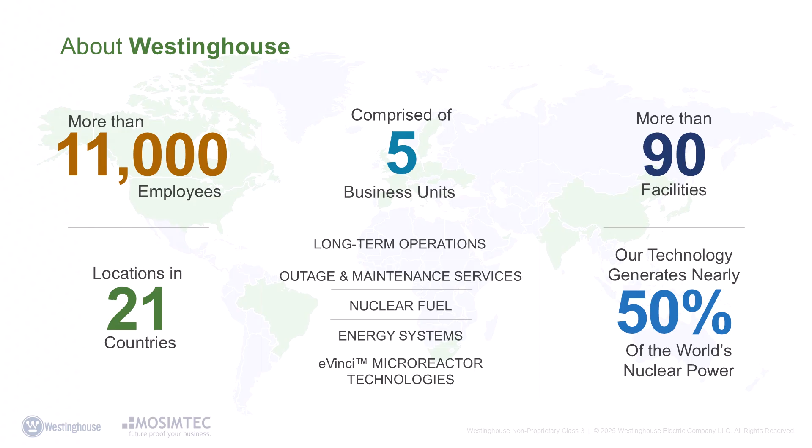The company employs more than 11,000 people across 21 countries, underscoring its international reach. It operates with 5 distinct business units: long-term operations, outage and maintenance services, nuclear fuel, energy systems, and the innovative eVinci microreactor technologies. With over 90 facilities worldwide, Westinghouse's technology plays a pivotal role in generating nearly 50% of the world's nuclear power, emphasizing its critical role in the global energy landscape. Today, our focus is on the nuclear fuel business unit.

Westinghouse is a complete fuel supplier, handling everything from development and manufacturing to core engineering, safety analysis, and fuel component manufacturing. Westinghouse offers 4 key fuel types. Pressurized water reactor is the most common type of nuclear reactor, using pressurized water as both a coolant and a moderator. It is characterized by its safety features and reliability.

In a boiling water reactor, or BWR, water is boiled directly within the reactor vessel to produce steam, which then drives the turbine. This design is simpler, but can be less efficient than PWR. Russia developed a type of PWR reactor, VVER, or water-water energetic reactor. This one operates similarly, but with differences in design, primarily in the pressure and temperature limits of the coolant.

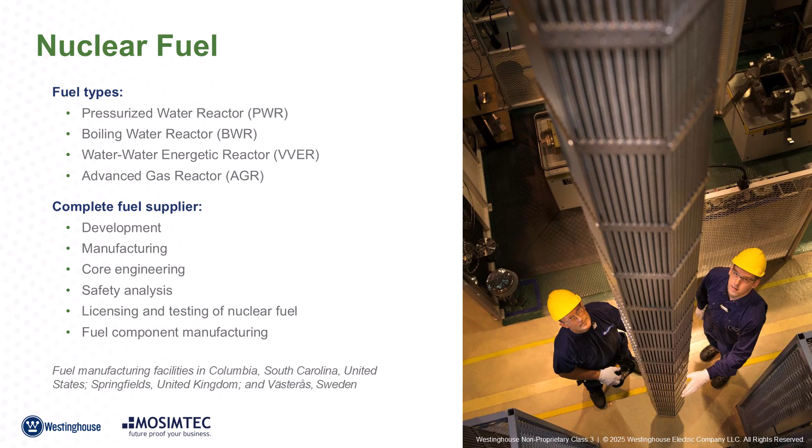Finally, advanced gas reactor, or AGR, uses carbon dioxide as the coolant and graphite as the moderator, with the core being heated by nuclear fission. It offers higher thermal efficiency and is commonly used for experimental or future energy designs.

So where does MOSIMTEC fit in? We are a consulting services company focused on utilizing modeling and simulation technology to make informed decisions. With a 14+ year track record and consultants with even longer personal experience in applying modeling and simulation, we're fortunate to work across a broad spectrum of industries. Return clients include very well-known brands and others you may have never heard of, but serving a key part of everyday life. We have a saying, one day we might be flipping burgers for a quick service restaurant, and another you're working on rocket engines for space exploration.

Our simulation work truly provides an opportunity to learn about a wide range of businesses, and more so, being able to guide our clients to know more about their own business continues to be really fulfilling. We're proud to call Westinghouse one of our many long-standing clients and appreciate the opportunity to share with you today some of the work we've done with them.

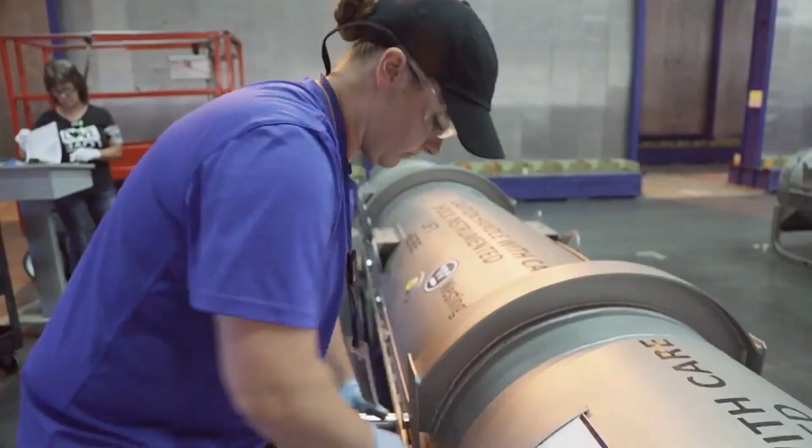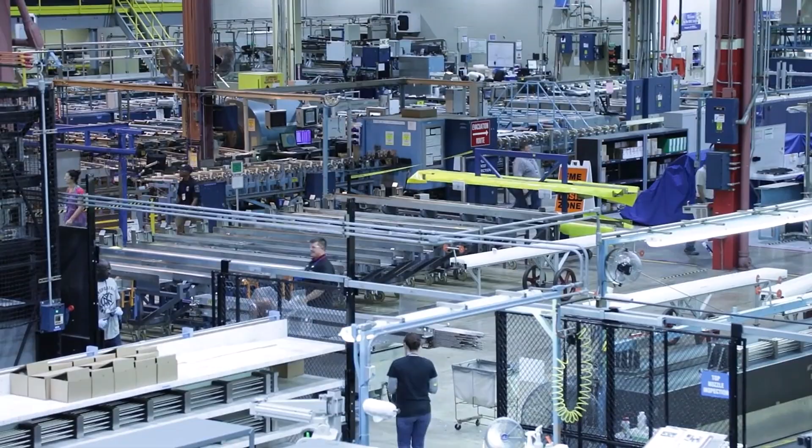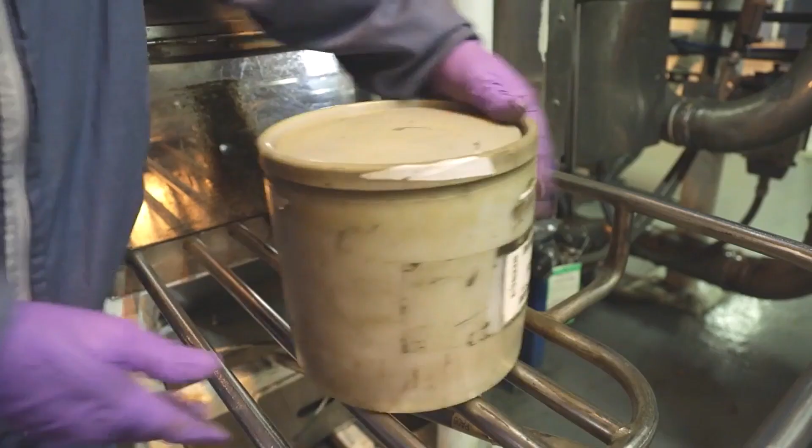The Columbia plant sits on more than 1,000 acres. Inside, the plant is divided into two main sections, the chemical side, where uranium is processed, and the mechanical side, where assemblies are fabricated. Enriched uranium is shipped to the chemical side of the plant. Here, it is converted into a gas and then into a powder. The uranium powder is tested to ensure it meets exacting specifications.

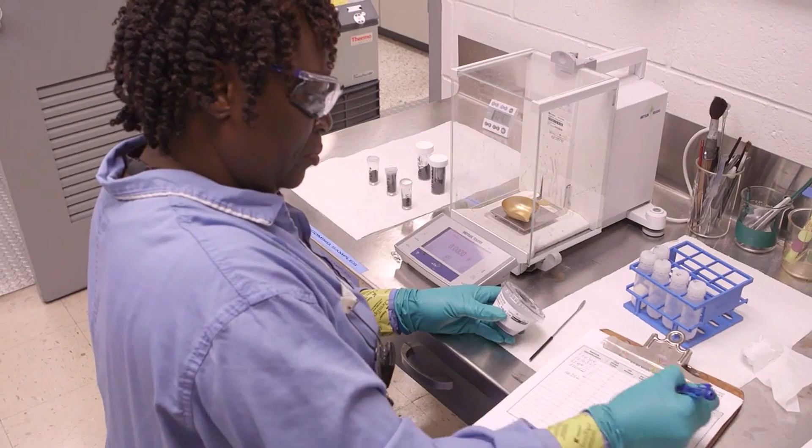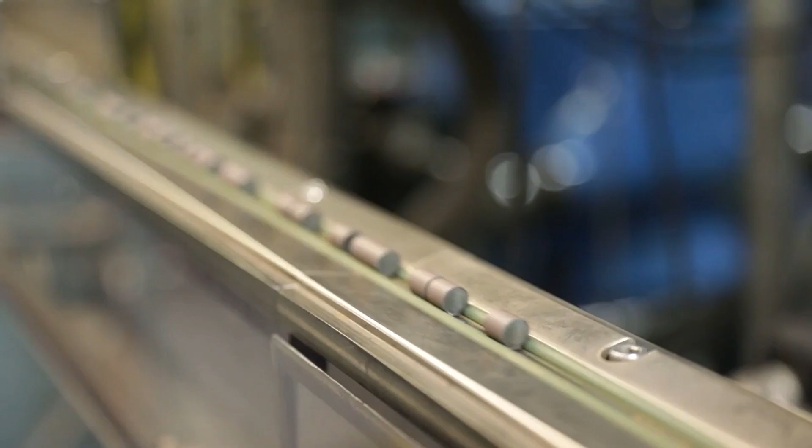In the chem lab, we test the quality of the pellets and the powder as they come off the line, and we have to make sure that the quality is good enough for them to move on and put into rods. The uranium powder is pressed into small pellets, each one about a half-inch long and holding as much energy as a ton of coal.

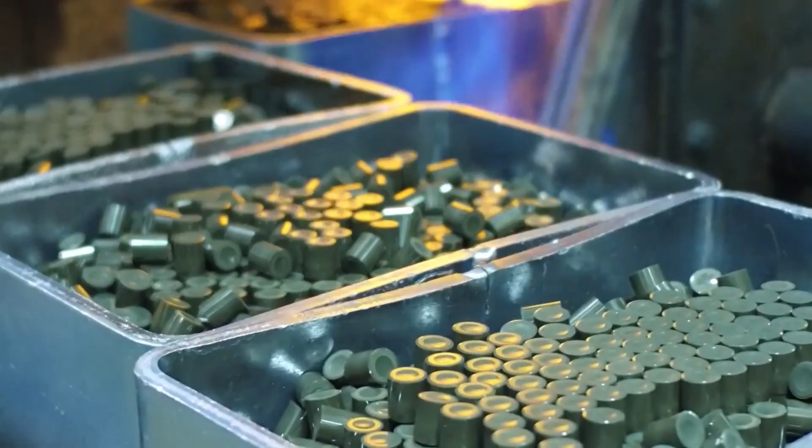Once pressed into shape, the pellets are fed into a high-temperature furnace that increases their density and converts them into a hard ceramic. And then we grind them down to the proper diameter, and then we inspect it before it goes out to be loaded in the rods. There are several production lines running at once, and control room operators monitor critical steps across the lines to ensure quality and safety. Control room purpose is making sure all lines are running by each parameter that's set by engineers. So you have different parameters set for each line.

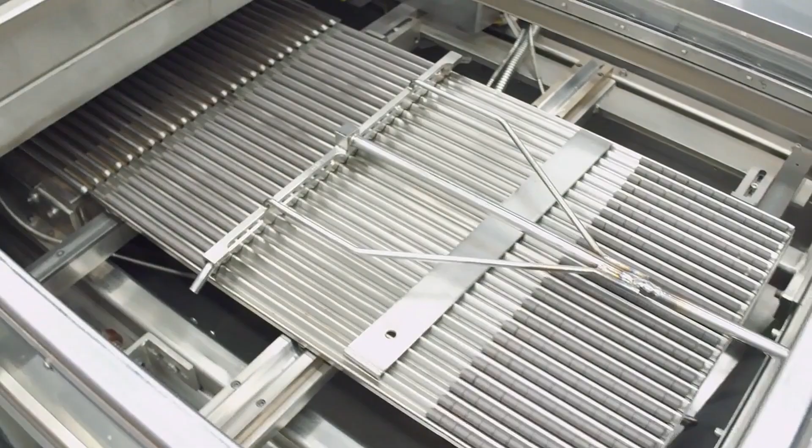In the rod assembly area, pellets are loaded into tubes that are manufactured at a separate Westinghouse facility in Pennsylvania. The tubes are pressurized with helium and sealed, and the completed fuel rods move to the mechanical side of the plant. Once it comes through the wall, it's now enclosed in a rod. It's encapsulated, and it's not just one pellet, but a series of pellets. And that rod, it gets treated. The ends get closed up, it gets polished, hardened on the tip.

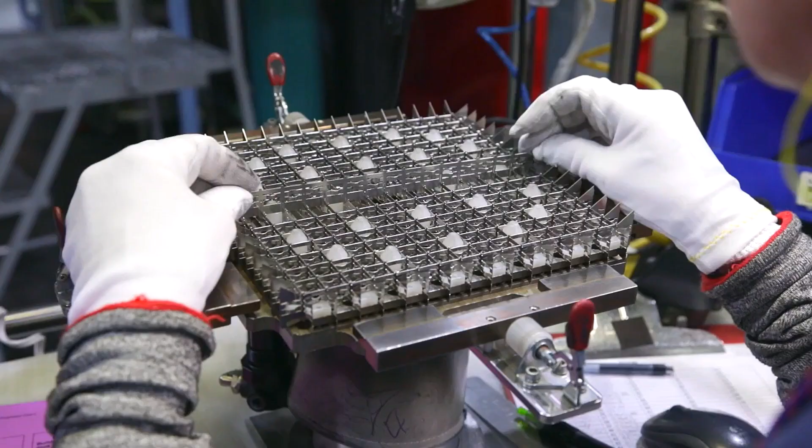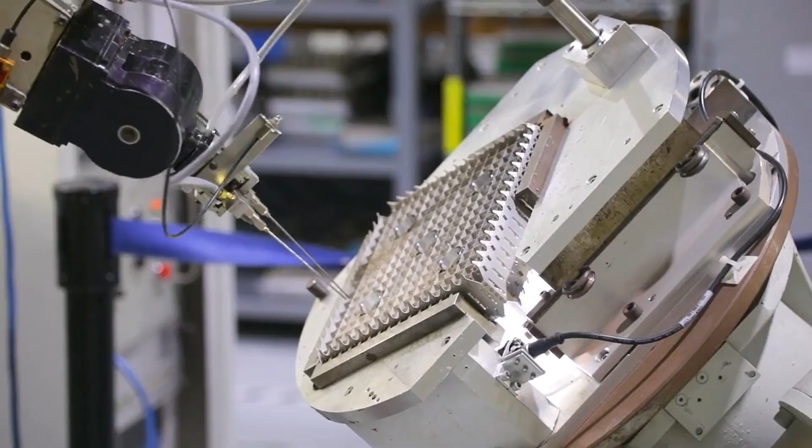Fuel rods are mounted into an assembly, the structure that holds the rods in place. A typical assembly can house 76,000 fuel pellets. Assemblies are manufactured on site using human skills and robotic technology. Once completed, assemblies are washed, inspected, and packed for shipping. At Westinghouse, what we do matters. We power the world.

The video you're about to watch highlights key components that make up a boiling water reactor, or BWR, fuel assembly. BWRs are just one of several types of nuclear fuel assemblies manufactured by Westinghouse. The video focuses on the major materials used in the top, middle, and bottom sections of the assembly. In both manufacturing and planning, we differentiate between nuclear and non-nuclear materials. Nuclear components include fuel rods, pellets, and their composite structures. Non-nuclear or mechanical components form the structural framework that supports the fuel rods. In the case of Westinghouse models, we concentrate on the manufacturing aspects within the facilities.

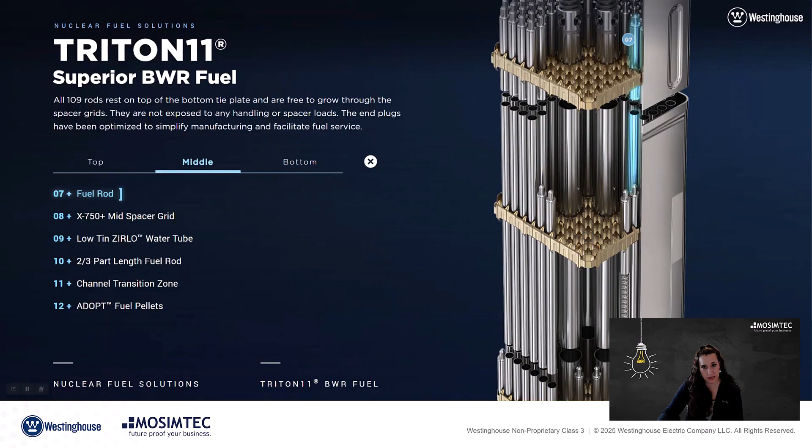The Simio model architecture identifies which materials are needed for a fuel assembly and triggers their production and consumption based on a detailed bill of materials. Each material type follows a specific manufacturing route, which allocates the necessary resources after consuming the required input materials. The model also considers inventory levels and work in progress before starting any production. To account for purchased materials, the model includes expected lead times for each item.

The planning process at Westinghouse, previously, we managed this through 5 separate sites, 5 different planning groups, all operating independently. The majority of it in Excel, with no integration, no constraint between. Manually entered spreadsheets, meaning that when we created the master schedule for 18 months to 2 years, if there were any scenarios or if there was a change, it would take us up to a week to be able to assess what that change was. And then each area would then flow down from that to allow it to be a final answer as could we do it or not.

With the implementation of Simio, what we've been able to do is make these decisions a lot quicker. The simulation model can run and we can change parameters, as you know, in Simio, based off the tables, based off the demand data, and run a simulation to assess the impact. But not only that, it is an integrated schedule for all areas to allow us to make sure that we don't have gaps in our analysis.

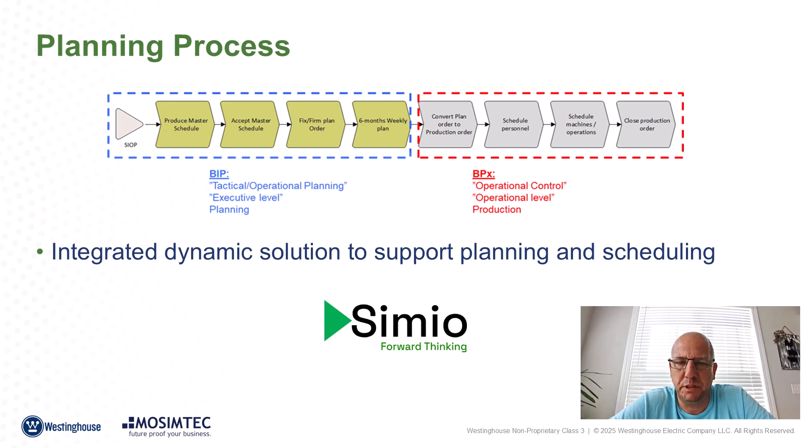Adding to the scenario building with the complexity across 5 sites, and you'll see on the next slide how everything is integrated with a vertical supply chain. It could take up to a month for us to do a high-level change at the Columbia facility to assess the impact on the WZ facility, which is at the bottom of the vertical supply chain, which would mean that if WZ could not do it, we'd have to start all over again or do a partial assessment, which would not give us the full visibility of the impact of the change we are proposing.

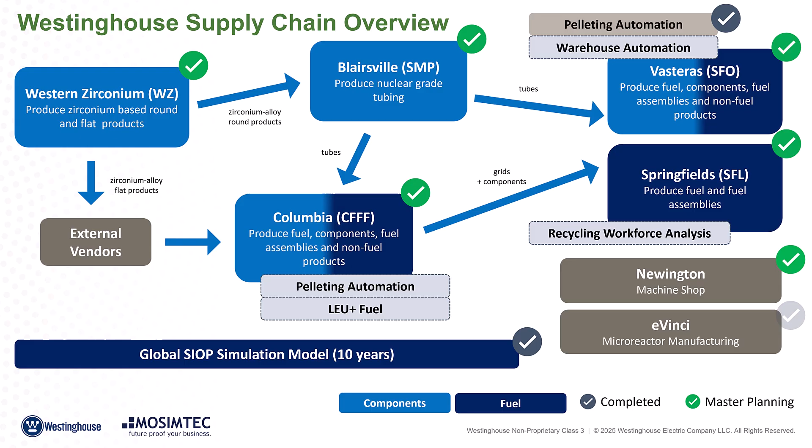This slide presents a high-level overview of the global Westinghouse supply chain, highlighting the interdependencies across various sites. Materials are produced at different locations and must be transported to the appropriate consumption sites to meet contractual commitments with both internal and external customers. These commitments are often tied to key performance indicators such as core loading plans, customer delivery dates, and/or contractual delivery dates.

For most sites, Westinghouse utilizes Simio's planning and scheduling tools indicated by the green tick marks, while a few locations have been analyzed through independent project studies also utilizing Simio, such as the pelleting automation and eVinci projects. These models help ensure that each site can deliver components or fuel assemblies on time by generating detailed production schedules tailored to meet delivery requirements across the supply chain.

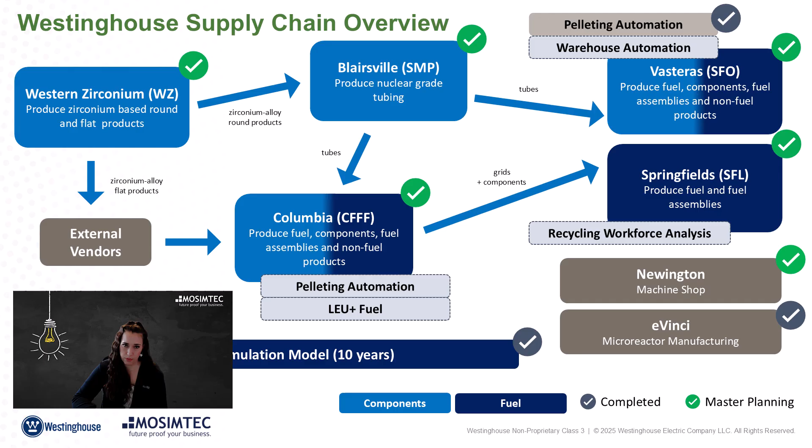At MOSIMTEC, we follow a proven process for deploying simulation models, a process we also use to implement digital twins at the Westinghouse sites. First, the functional design specification. We begin by developing a detailed specification document that outlines the system to be modeled, the modeling approach, and the required inputs and outputs. This ensures alignment on scope and expectations from the outset.

Then, phased model development. Our modeling approach is iterative. We build the model in phases, enabling the customer to see a working end-to-end version early on in the process. With each iteration, more detail is added, allowing for flexible adjustments and informed decision-making throughout the development cycle. Verification. This is the formal process of testing the model to ensure it meets the specifications and it performs as intended. Verification confirms that the model behaves according to the design and logic outlined in the requirements.

Data collection and ETL. Because we emphasize a strong specification phase, data requirements are clearly defined before development begins. This enables parallel workflows. Data collection and transformation can proceed alongside model construction, improving efficiency. Validation. Validation ensures the model accurately reflects the real-world system behavior. While verification checks internal logic, validation evaluates the model's outputs and assumptions holistically, confirming the full model ecosystem, the code, assumptions, and input data, behaves like the actual system.

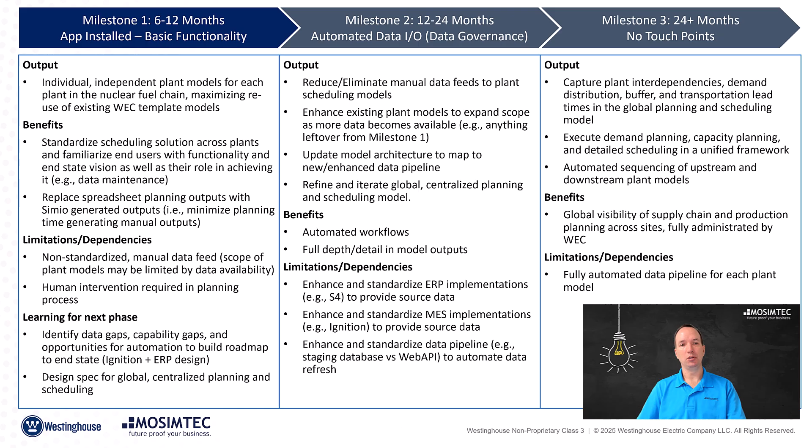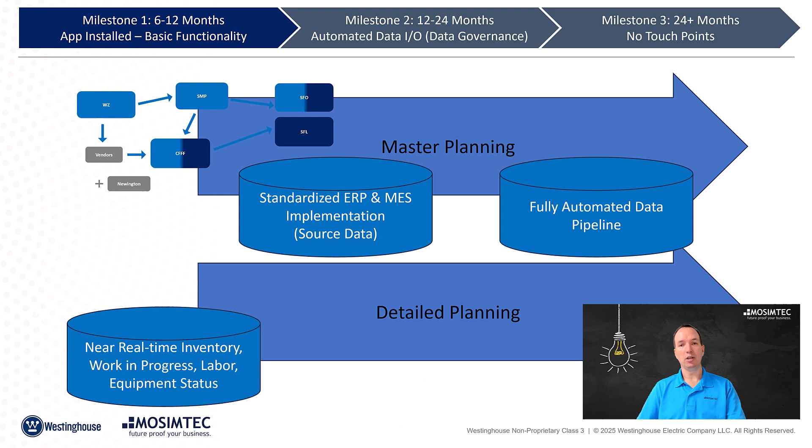Various sites at Westinghouse are at different levels of maturity with regards to milestone 3. This is where digital twin solutions serve strategic long-term planning, master planning, and even detailed planning. Each of these applications have a key prerequisite of either standardized source data towards a fully automated data pipeline or more granular near real-time data to represent accurate current state.

This data feeds into Simio, which processes it to produce capacity feasible planning and scheduling. Specifically, Simio supports critical functions like master production scheduling, MPS, resource capacity planning, material requirements planning, and detailed planning. The output from Simio includes manufacturing orders, planned orders, inventory levels, task lists, resource assignments, and material requirements. This ensures that operations are aligned with the availability of resources and materials.

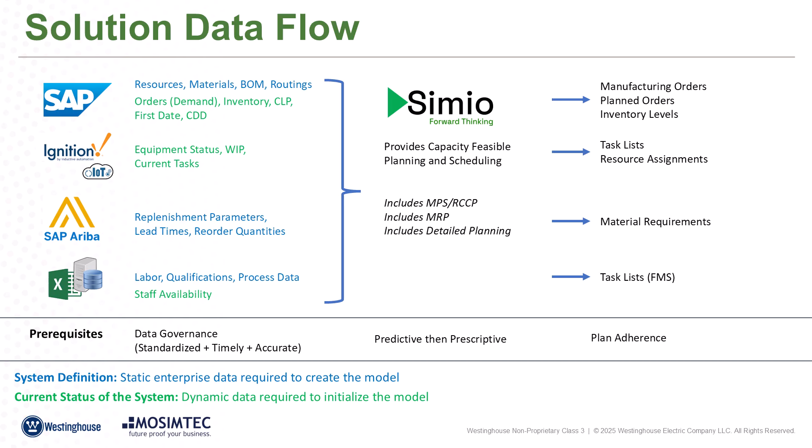For us, system understanding and definition begins with the development of a detailed functional design specification, as mentioned earlier. We believe that if you can't clearly describe a system, you can't model it effectively. This document outlines both the real-world system and the intended model, using diagrams and narrative to convey the necessary level of detail. The functional design specification is reviewed and approved by the client, ideally before model development begins.

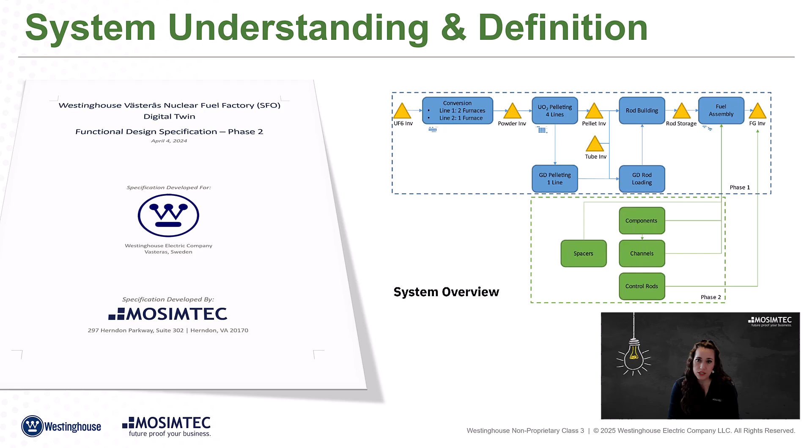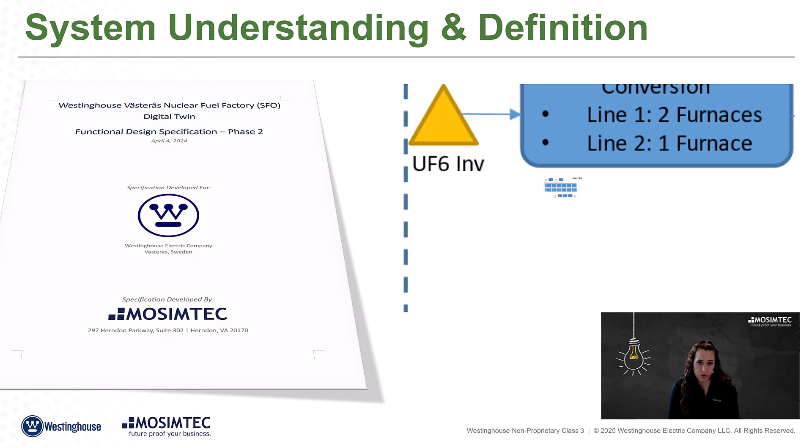However, it remains a living document, evolving alongside the model as new insights emerge. Clients at the Vasteras site have expressed that they find this document especially valuable as it provides a single, comprehensive reference that captures the entire process from start to finish.

To build a true digital twin that extracts live data and runs a scheduling plan, it was crucial to ensure the right data came from the right sources at the right time. To prepare the data for import, we developed extract, transform, and load, or ETL, solutions to clean and integrate the raw data. This was an iterative process involving on-site stakeholders with many adjustments made along the way.

Currently, the data import is Excel query-based, which is not the final enterprise version, but works well for the current stage due to its flexibility and quick implementation. Throughout model development, we made extensive use of error logs to provide feedback to the clients, helping them clean and standardize their data.

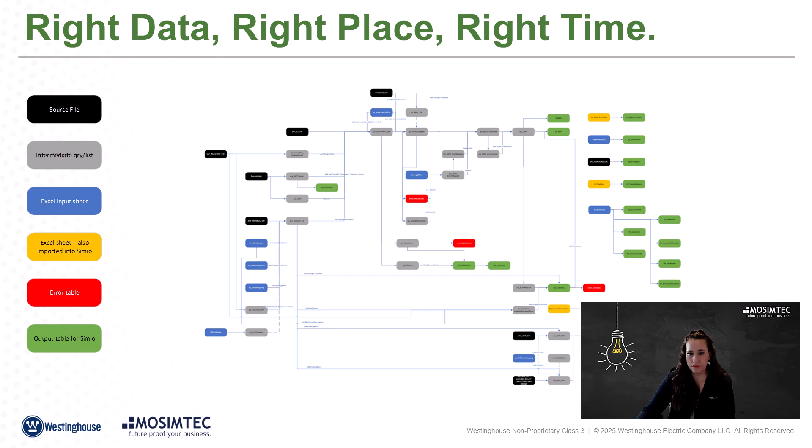The result of the ETL process is shown in this slide. It illustrates the model-ready data schema within Simio, highlighting the relationships between the various data tables. The models we created are fully data-driven, meaning they rely on real-time, dynamic data inputs. This approach provides users with the flexibility to quickly refresh and generate new plans that span multiple years. What previously took weeks can now be accomplished in just a few hours, enabling faster decision-making and more efficient planning processes.

Production performance. After each run, users can see a comprehensive overview of production performance. This includes a comparison of the results from the generated plan to actual operational or contractual targets. This feature helps assess whether production goals are being met and highlights any discrepancies that need to be addressed.

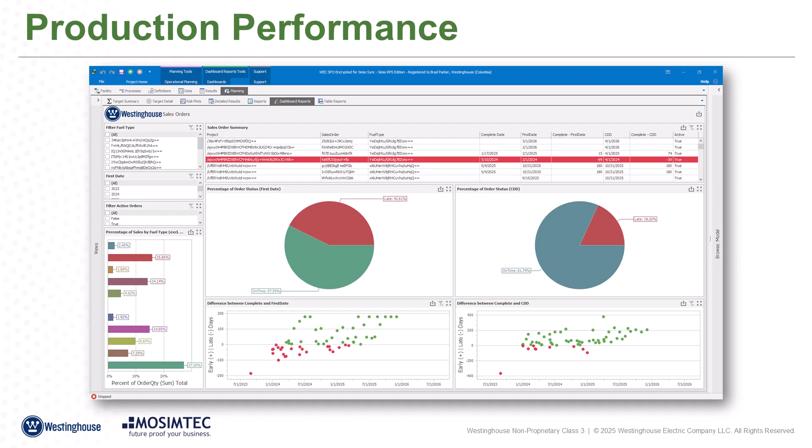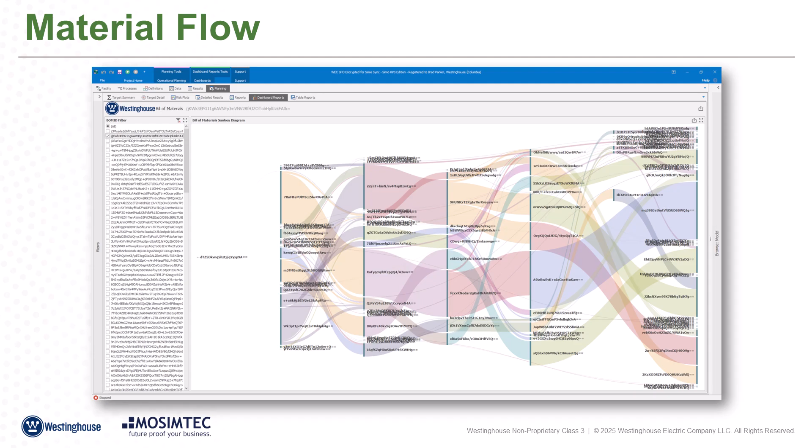The flow of materials. This dashboard visualizes the flow of materials throughout the production process, ensuring it matches the bill of materials. This is crucial for tracking material consumption and verifying that the right materials are being used at each stage of production.

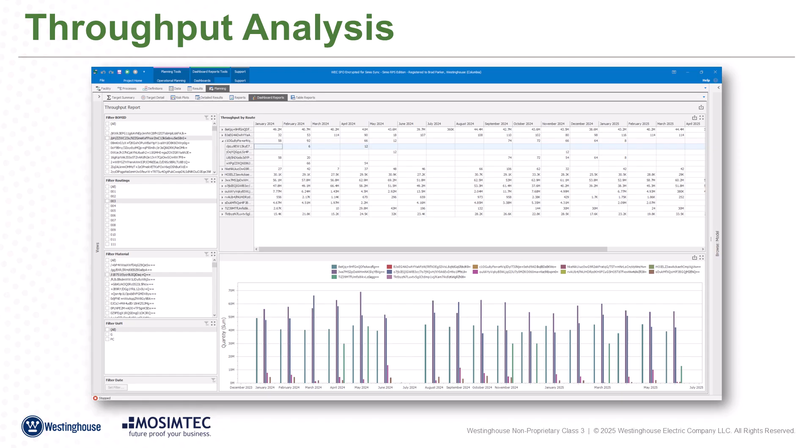Throughput analysis. Detailed throughput data can be analyzed by area, providing a clear view of how materials and resources are performing across different parts of the facility. These reports are shared with area managers and planners to ensure coordination between departments, so everyone is aligned towards the same production plan. It also helps identify areas that may require adjustments to improve efficiency.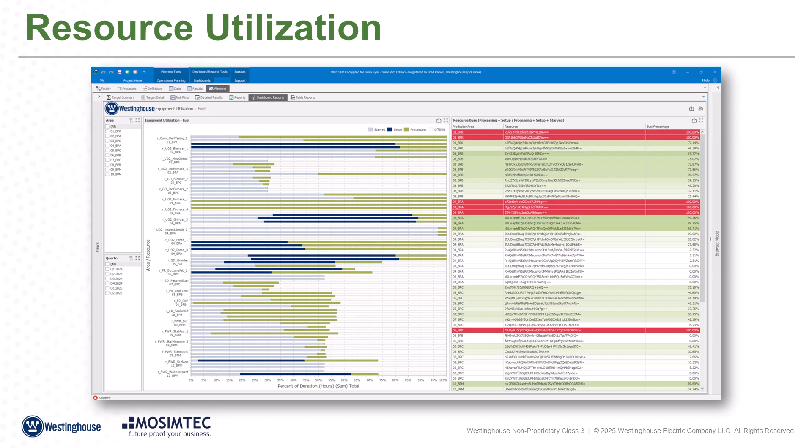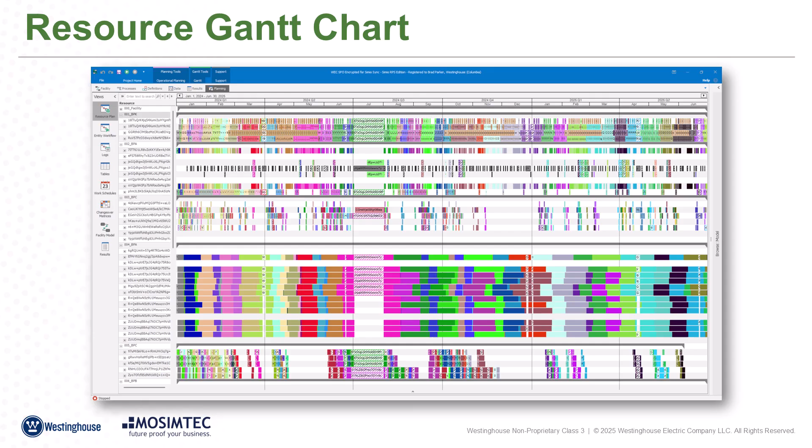The resource Gantt chart. This is one of the most widely used dashboards at Westinghouse. It provides a high-level view of the system, displaying how sales orders, color-coded for easy identification, move through the various manufacturing processes within the facility. This chart helps track the status of each order and offers a visual representation of the entire production timeline, making it easier to identify potential delays or areas that require attention.

Implementing a digital twin can be challenging due to several common pitfalls. These include data issues like missing, incorrect, or poorly formatted information, which can undermine the model's accuracy. Our advice is to make sure you understand the source of the data and how it was measured. Stakeholder engagement is critical, as lack of buy-in or misaligned expectations can lead to delays or scope creep. Communication and transparency is key here. Make sure you engage your stakeholders from the beginning of the project and throughout, rather than presenting them with a solution at the end.

Additionally, a deep understanding of the system is essential. We have a saying that if you cannot explain it, you cannot model it. This supports what Gerda shared related to the importance of functional specifications and process diagrams. You may have to coordinate with different subject matter experts across the organization to truly understand the system. Simulation projects have resulted in different departments sitting around the same conference table for the first time, understanding how their own area impacts another. Keep in mind current and future state of operations to correctly represent the system and possible model levers. Once you do start getting results from the model, be sure to be in a position to explain cause and effect of the different results observed.

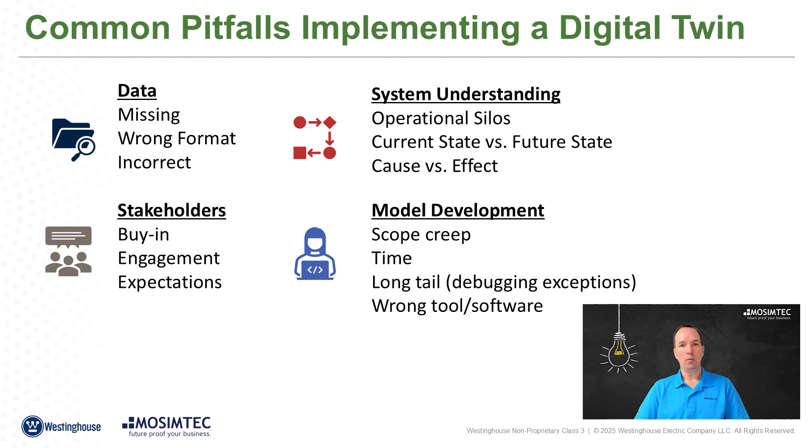Lastly, model development can suffer from scope creep, time constraints, debugging complexities, or the use of the wrong tools, all of which can impact the success of the digital twin implementation. Have a strong project management add-on, yet allow for variability and adjustments in the project as needed. We are, after all, in the business of discovery and making sense of complex systems.

So for Westinghouse going forward, we have rolled out what I would consider the basic Simio simulation software. Now the future holds the opportunity to expand the utilization. We are focused on nuclear fuel. However, we are starting to see other parts of the business show interest. eVinci is one example. But how we document and future utilize this with the functionality we've not even touched on yet is where we will be trying to take the Westinghouse organization and the utilization of the Simio solution.